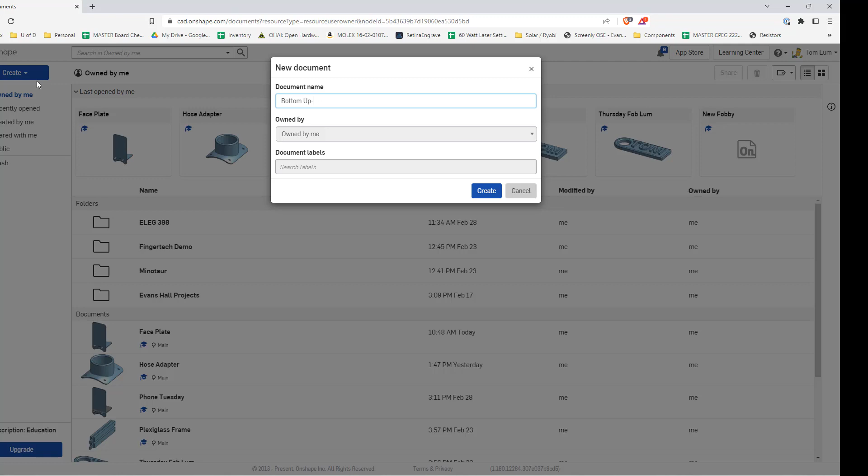Let's get started. I'm going to create a document, and I only need one here. I'll call it bottom-up phone stand. This is a different design technique than the previous one.

I'm pulling this from the file section. There is a document in the CAD files for a dimension drawing. I'm printing them out so you can have them, but it's all here, and it gives you all the dimensions you need for building this phone stand. That's what I'll be referencing.

First thing I'm going to do is Part Studio 1. That's going to build what I'm calling my faceplate. I'll select this front, hit P to get that plane, and N to go normal to it.

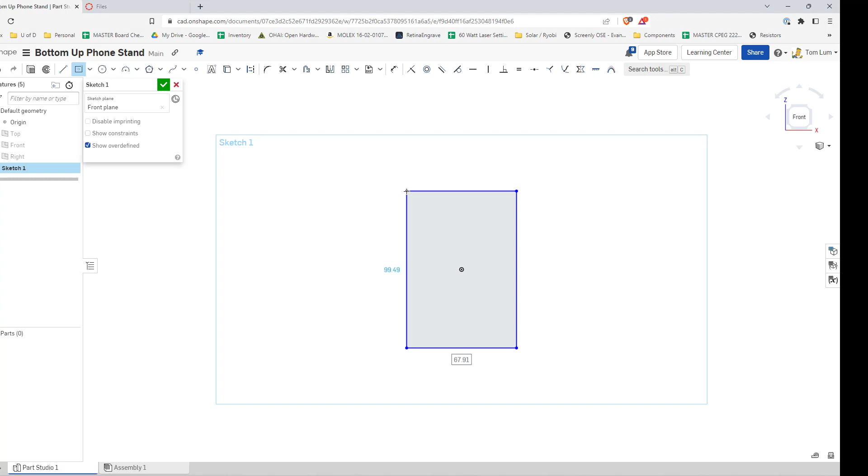I'm going to create a center point rectangle, locking on there, then 70 millimeters this way. Part of the lesson was learning to use mixed units, so sometimes that happens. I'm putting in 6IN for the other dimension. You can't use the quotation mark unfortunately, I wish they would let that happen. I've had a few times where I'm like, why won't this thing dimension? It's because I was using the quotation mark.

Fusion does allow that. Now I'm going to do some sketch fillets here, just rounding these corners with a dimension of 10 millimeters, rounding all four corners this way and grabbing another two sides. I'm clicking left, clicking left, click again, click once to set it, confirm it, and hitting enter to do 10. That's essentially most of the faceplate.

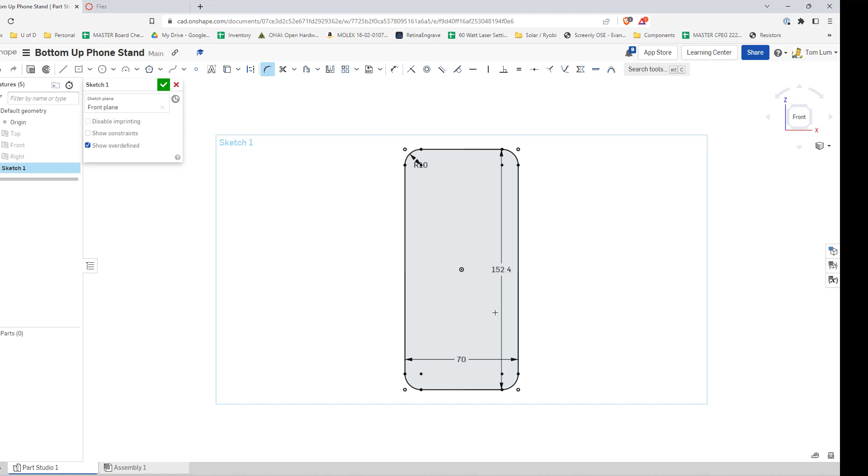Now let's create some legs here. I'll zoom in a little bit and do a 3-point arc with the A key, clicking here and here. If I turn this a little, you can see it's the ends of those fillets - when they finish up that creates a little dot. So I'm going to use those dots to build this arc on.

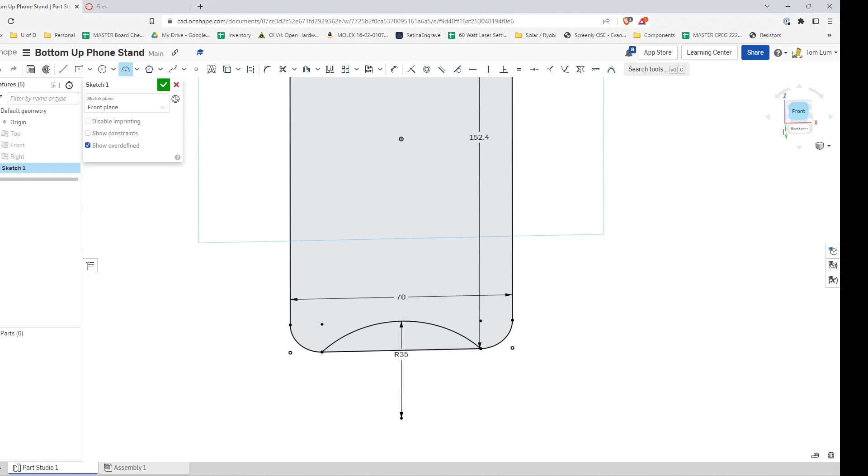I clicked on both of the dots, and then I'm going to radius this to 35. You'll notice this dimension goes out to here - that's because this radius is of a whole circle, and we're only using part of that circle or a section of it. You can click back on the front here again. So that is essentially the whole shape.

Now I just need to cut out those three little slots here that the legs will slot into and create our phone stand. For that, I'm going to create a line, and I'm not going to put it where it actually goes - I was talking about this in class. I typically don't draw lines or shapes correctly at first, so that way, hit escape, when I dimension them, I know they're locked into place exactly where I want them.

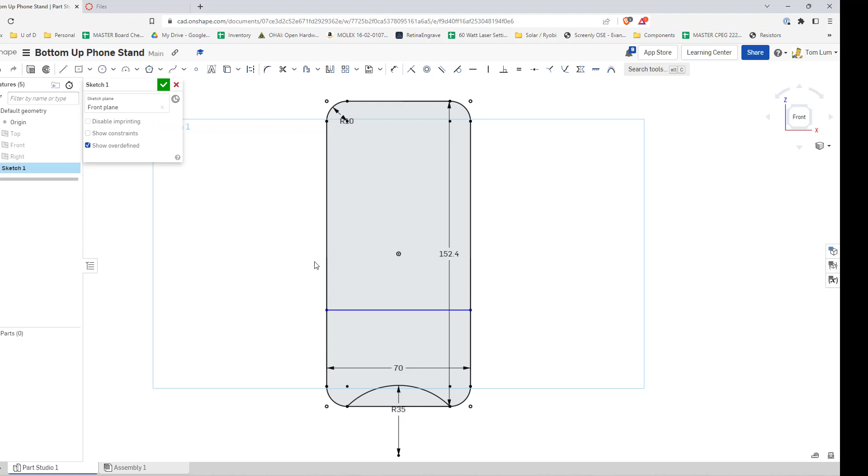This blue line right now is a solid line. I'm going to change that to a construction line, so it changes to a dotted line. This allows me to use it as a reference point without it actually being part of the official sketch, as it were. So the laser cutter, 3D printer, or any extrusions won't see this.

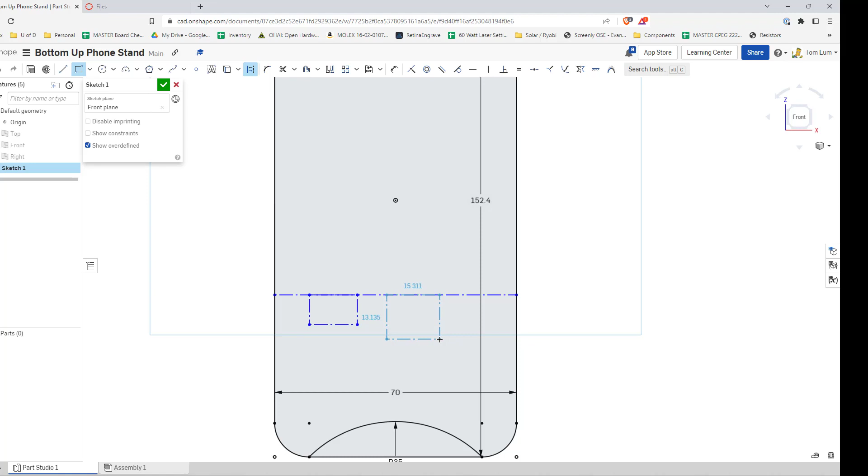Now I'm going to draw three corner rectangles using this construction line as a starting point. I'll draw them not anywhere near to scale, so that way I know when they're correct. Oh, I forgot to dimension that line - let me back up here. I'm still in construction line mode, so let me dimension this first.

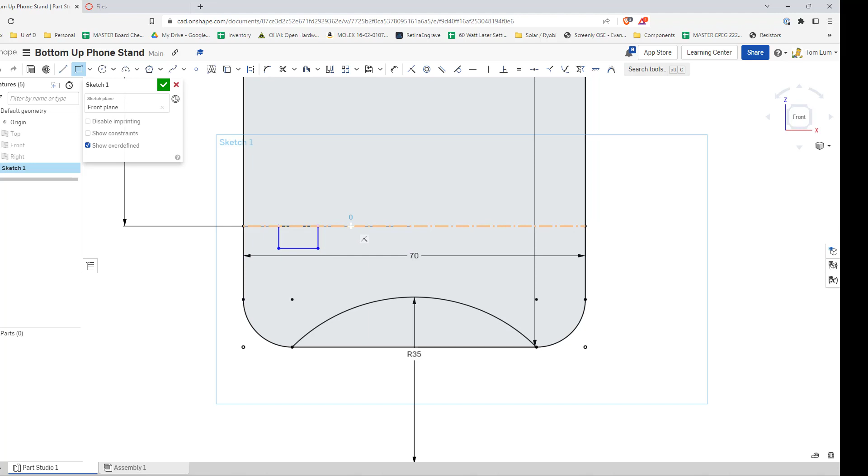This is going to go from here, to the top of the phone faceplate, to there - that's going to be 5 inches. There we go, I was wondering why it was a little weird. Now we'll draw these corner rectangles. Notice now they're not dotted lines - I didn't even notice until I was done. So, 3 rectangles there.

So now I'm going to dimension these. This dimension from here to here is going to be 10 millimeter. Again, from here to here, 10 millimeter. And then from here to here, 10 millimeter.

Now between them, that's 10, 10, and 10, which makes 30, and this whole thing is 70. So that leaves me 40 millimeters to divide up 4 ways evenly. Even if you aren't a math major, 40 divided by 4 leaves me with 10 on each.

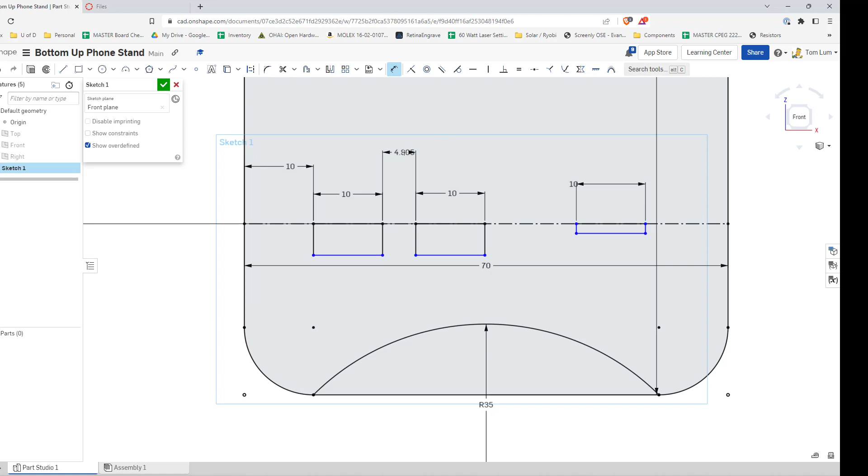So I'm going to go 10 here, 10 here, and then 10 here. In class, somebody did this, and this is perfectly understandable. You want to dimension this one, but this one is not a dimension you actually need to give it. It'll actually, in my case, show shaded.

His turned red. The reason it's shaded is because it was called a driven dimension. That 10 is not necessary because that's the only amount it could be, since I've used up all 70 for the rest of it. So that takes care of that dimension—I don't have to use it.

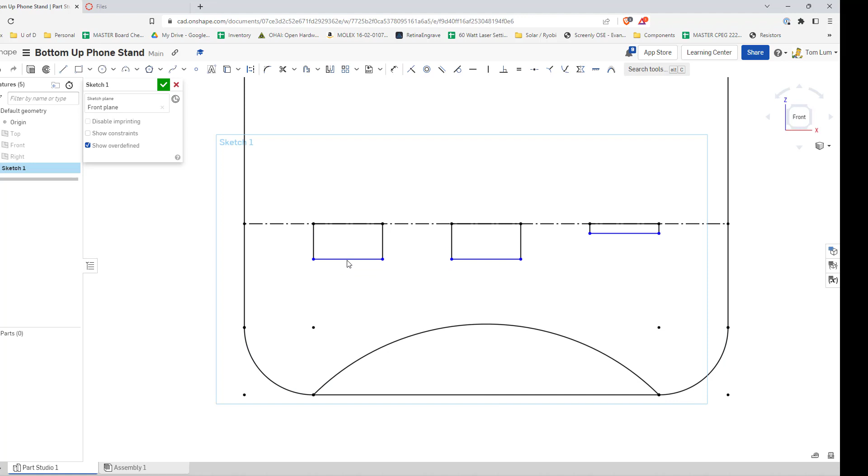All right, last thing. Let me hit escape here. These are locked in, or these two are locked into each other. I didn't want them to be, but okay. And then this one here, these are blue because they're not constrained. So I'm going to dimension them. And this is what we learned for today.

This dimension here is not going to be an actual dimension, but a variable. I'm going to hit the hashtag and type in thickness. This creates a variable, and it brings up a whole bunch of stuff here. So why is this a variable?

Well, different acrylic we cut this out of, or wood, or whatever, can have different thicknesses. Rather than putting in a dimension and then, if it doesn't work, having to find everywhere I used the dimension and change them all, I'm grouping them together as a single variable, and I'll create one dimension for that variable. In this case, 2.85 millimeter. Hit enter, and now that is 2.85 millimeter right there.

This one was locked to this one. Typically I'll show constraints, and I think it was this constraint here—not horizontal, I want to say it was a collinear constraint, or maybe not equal. Not sure where, maybe they're not even calling it collinear in Onshape, but either way, it locked in as well. I'm going to turn off constraints because it gets a little confusing.

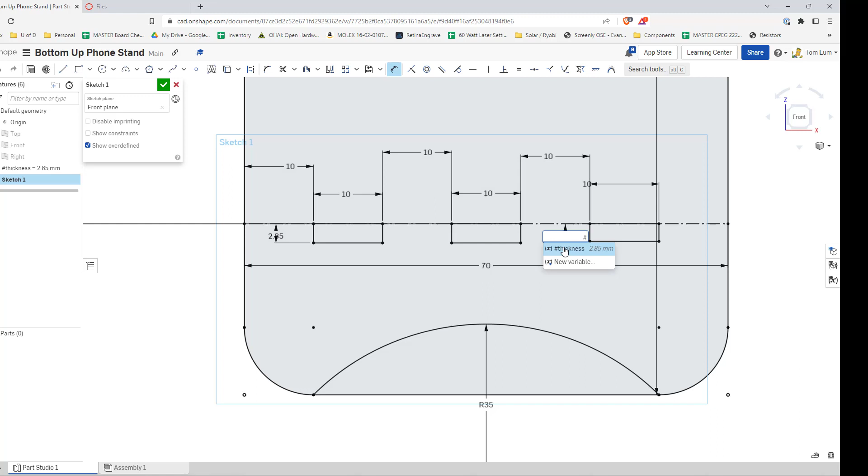All right, last one, I'm going to dimension this one by hitting the D key. Again, I'm not going to type in the number—I'm going to type in the hashtag or pound sign, then thickness, and hit enter. It seems to be... there it is. I was thinking about it for a second, like, why is it worried about that?

All right, so that is the faceplate. Last thing I need to do, let me finish my sketch here. Last thing I need to do is extrude this.

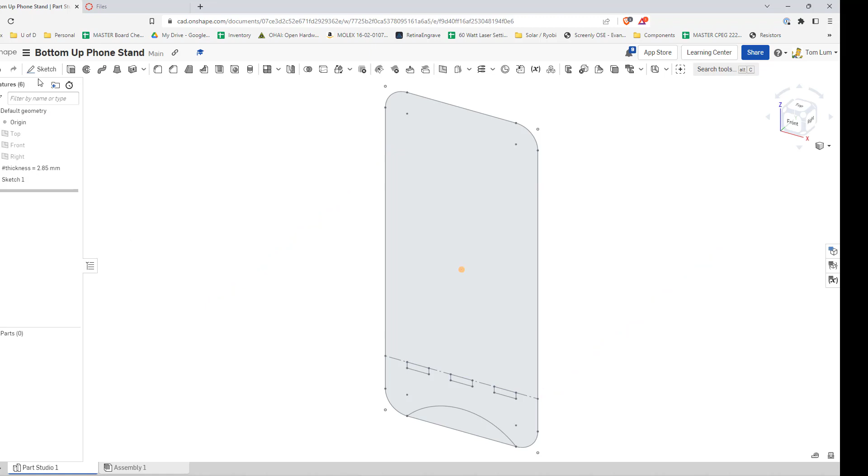I'm going to turn this on its edge a little bit using that top right front corner there. I like that corner for sketching or extruding stuff. I'm going to extrude this and just click this part. And now, same thing again—I'm going to use the thickness variable because that is the thickness of my acrylic, and I can change that at any time.

So there we have it, that is the faceplate there. And I'm now going to right-click down here. Instead of Part Studio 1, I'm going to rename this as faceplate, maybe Studio. And I'm also going to right-click this Part 1 and rename that as faceplate as well.

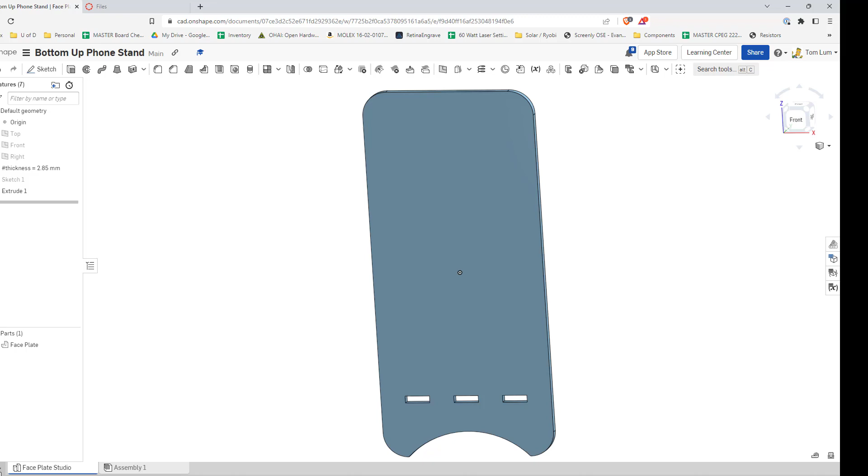So this allows me to know what this thing is because I'm going to make another studio now. If everything is called Part 1, it gets confusing when we go to put these together. All right, so I'm going to go down here, insert new element, the plus sign, create a part studio.

All right, new part. This is going to be the legs. So what I'm going to be building is this part here using this sketch, and we will then assemble them when they're done. Before I was trying to make a sketch plane on there, and things got a lot confusing. So I'm going to rename this right now, Leg Studio.

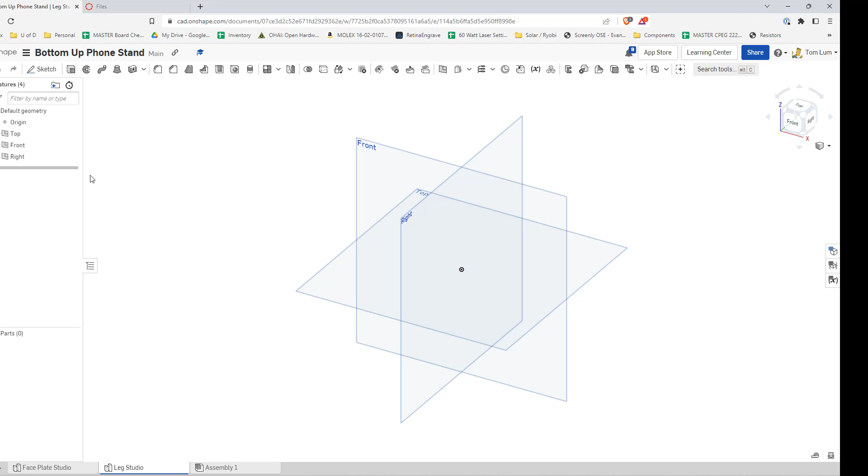And let's go ahead and start a sketch. I'm going to start it on the top plane, normalize, lose those. And this one.

Again, a center rectangle. I am going to go with, there's a few ways we could do this. I'm going to go again with 70. And in this case, I'm going to go with 60 for here.

All right. I'm going to fillet those edges, just these two, the top ones, if you want to call them top, right here and here.

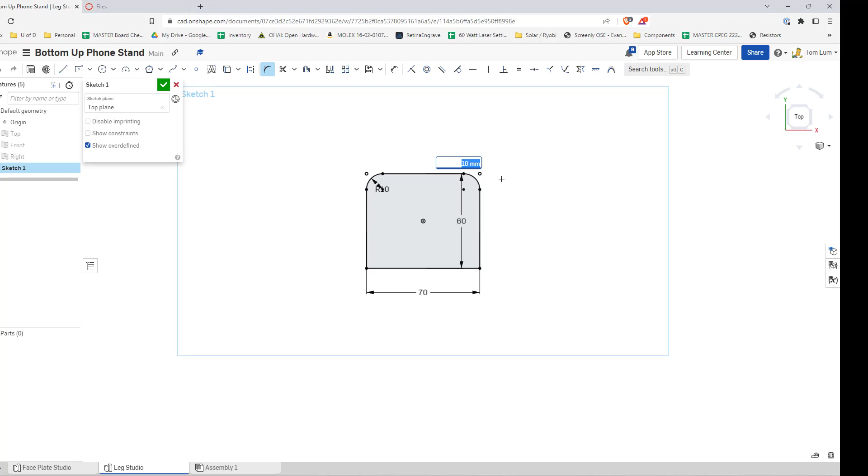I am also going to create that arc again here. This gives me legs. Oh, I did not get that click in there at just the right spot where I want to hit A, but I'm going to do it this way instead. Here and here. Pull this down again.

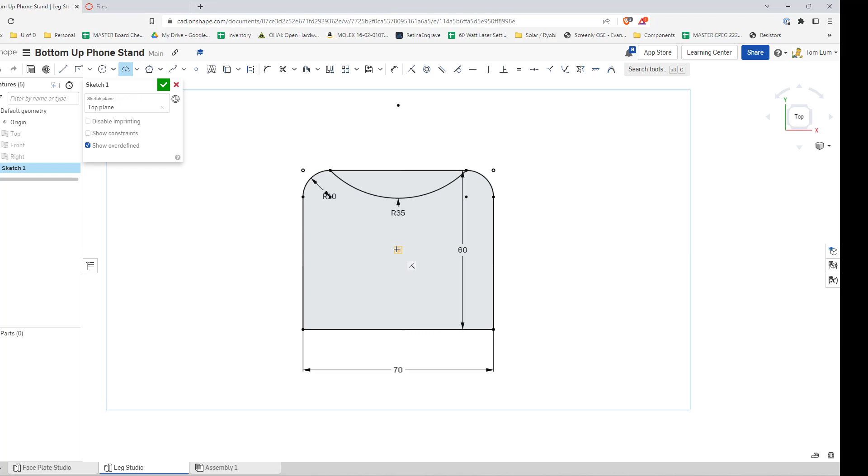It was 35. And I'm also going to create a circle here just to run like a power cord through if we need to, or just give it some visual flair. Something like that. All right.

So that's essentially it. That builds most of this. Now I just need to create these little bump out legs here.

So there's actually 3 of them. It's hard to see this one. There is one leg here. There's a little one that you can't see sticking through. I don't want it to stick through because if you're doing a charging cable, it won't be able to stick through there. And then this one, long one there.

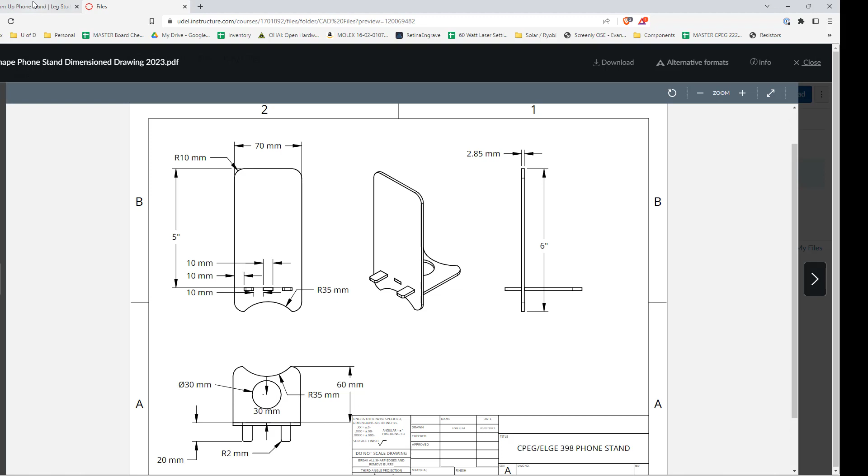All right, so again, going to do a corner rectangle. And I am going to draw these not to scale.

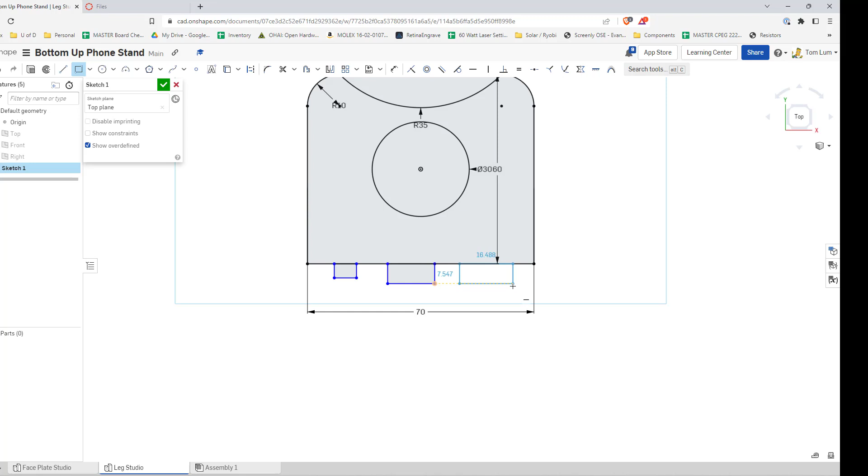Oh, see that line that showed up there? I don't want that to happen, that dotted line. It was trying to like zoom in or lock in on something else. I want them to be, see that? I don't want that to happen. I want them to be their own rectangle, if that makes any sense.

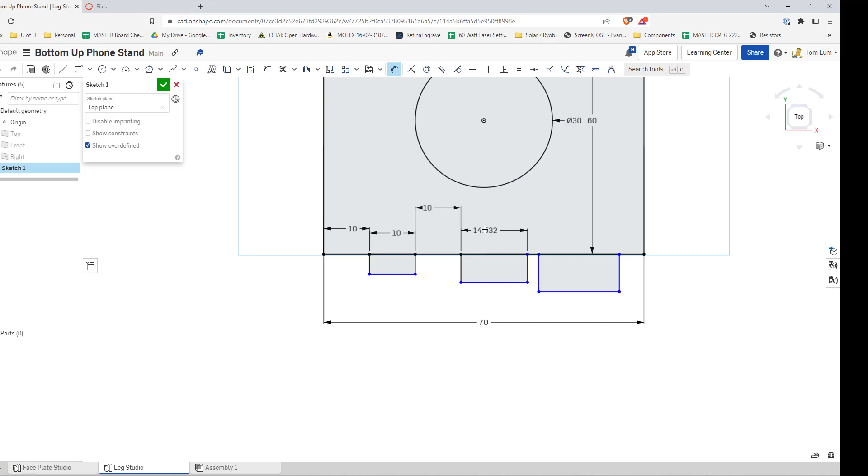All right, let's dimension these again. From here to here is going to be, again, 10. From here, that's 10. And this could also be a variable too, but I'm just going to put them in. We'll do one variable for today, and that'll be enough. 10. 10. And lastly, 10. So now notice they are different lengths, but these are going to be different.

So first one here, this one is going to be 20. And this one is going to be 20. This one only needs to stick through and go flush. So that is that variable thickness again, because it's only going to go through the faceplate.

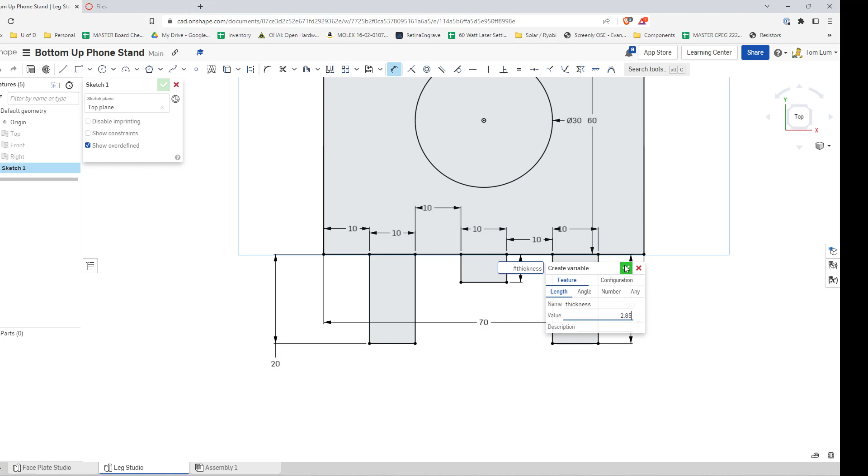Oh, this doesn't know about the old variables because it's in another part. So I'll have to create this again. I do want to do it, even though it's just one. I want to be able to find it again. So if I need it, we could do that one. There's probably a way to link it to the other one, but I'm not that familiar with Onshape yet, so we'll just call it thickness for now.

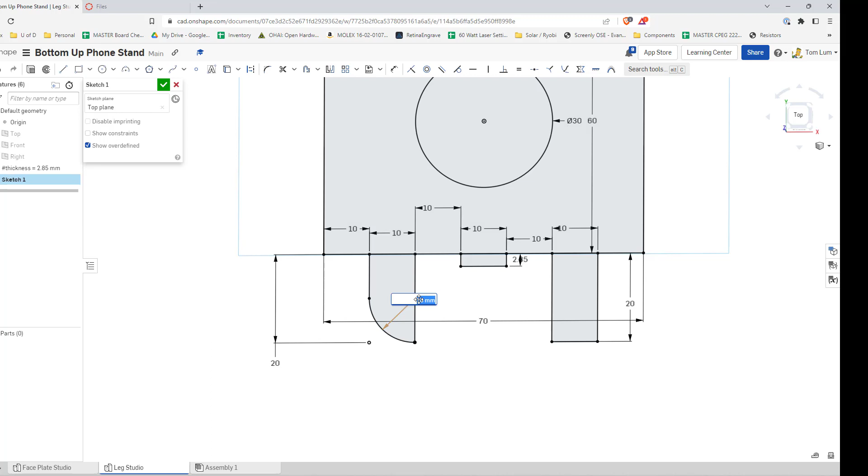All right, last thing I would like to do, I want to fillet these edges, just these two here. I'm going to do a 2 for this one. Let me do 2 millimeter. Reason I want to do 2 millimeter makes it easier to insert those legs through invalid geometry because it's too much. All right, let's try that again.

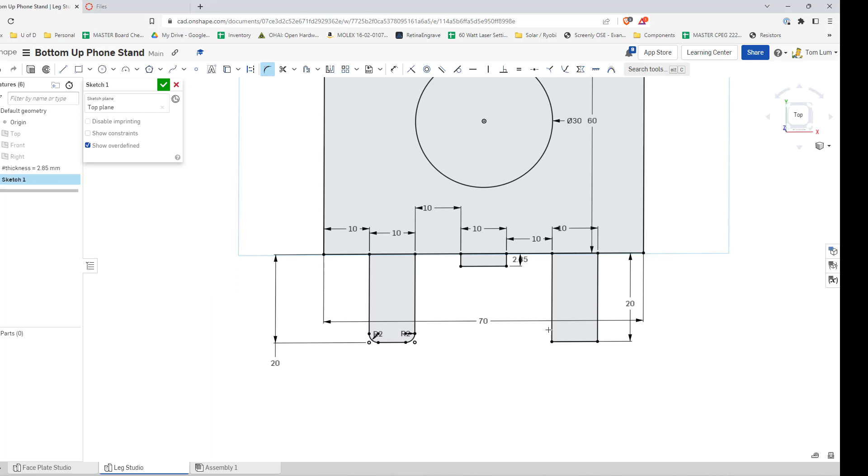It's not happy with, it's trying to remember 10, I guess. All right, let's pull that back out there. And we'll do 2. Try that again here. Hopefully it remembers 2 now. Yes. It kept remembering 10 for some reason.

And then 2. So these allow those forks or legs to stick through there and makes it easier to insert into the other piece of acrylic. All right, so that should do it.

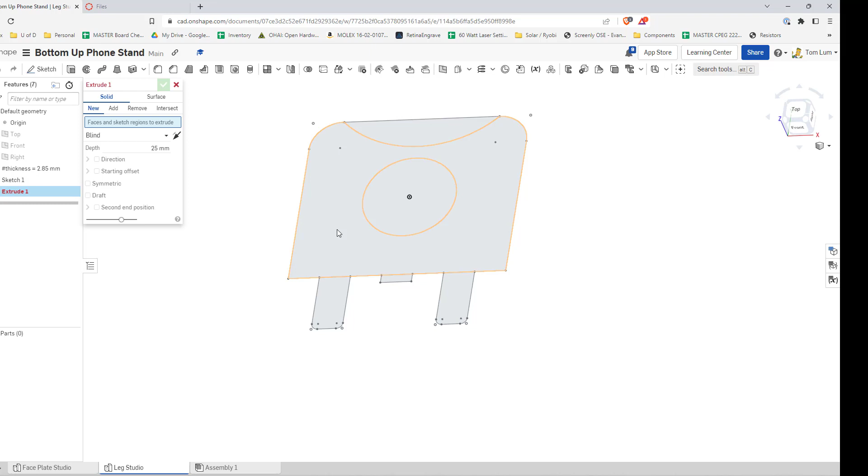All right, so now we're not going to select this part. We're not going to select this part, but we do need to pick up these legs when I extrude it. So I'm going to extrude. I hate that it just does 25 each time because then it makes it hard to understand what's going on.

But we want those 4 parts. And again, we're going to do thickness. Click OK. So that is my legs. So I have now my faceplate here, my legs here, and now I'm going to create an assembly.

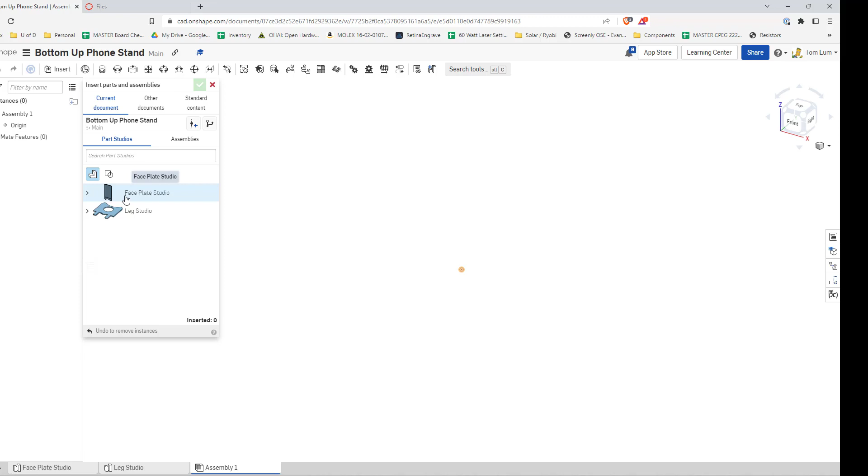This is going to assemble them together. So right here, I need to insert the parts that I want. You can see now why naming them makes it easier. I can hit that chevron and just say faceplate. Only do it once, otherwise it brings in a few of them if you keep clicking again.

Need to hit that chevron, hit that part. Now I forgot to name that part, so that's why it's saying part 1. All right, I'm just going to click somewhere and click OK.

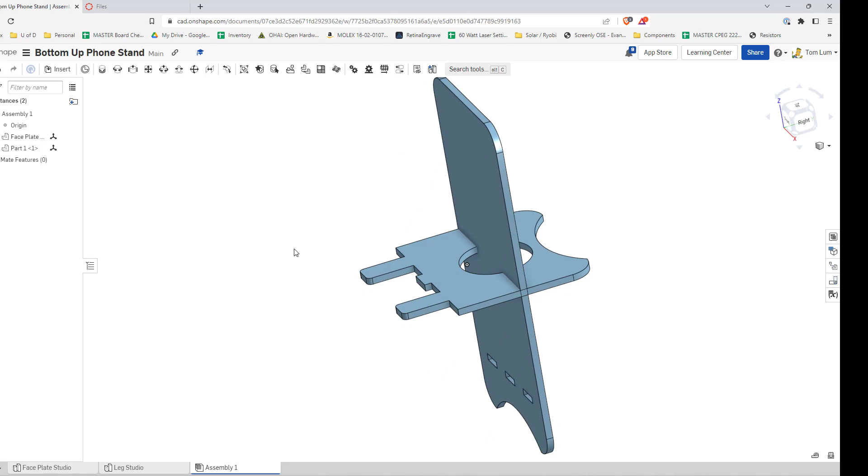Now, this is a horrible phone stand, as you'll notice. It is just going by that origin. Remember, we built each of these kind of centered on the origin. So what I need to do now is tell it, hey, these legs need to go through this part here.

I only need to do one part, so I'm actually going to use this rectangle here and lock this to the front of this rectangle here. So that is a fastened mate. That's the most common one. There's no movement in these. It just kind of glues them together, if you will, digitally glue.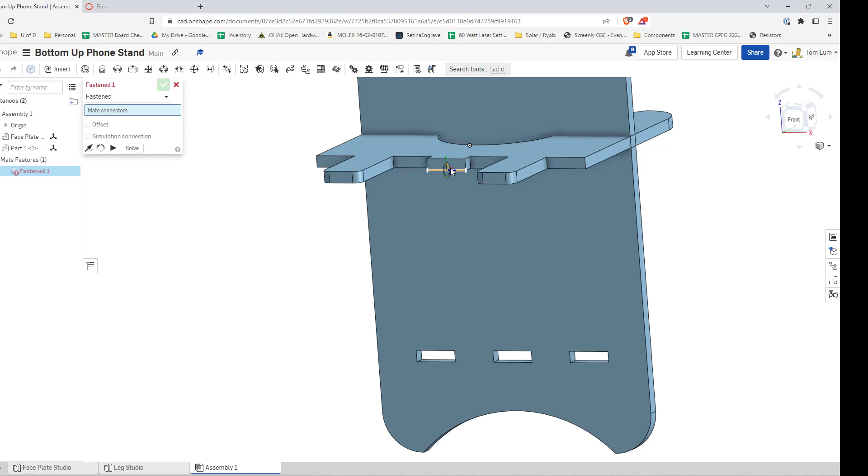So I'm going to click on that. And then I'm not clicking anything yet, I'm just hovering. But you can see it's like picking up all these geometries, and it's like, where do you want? So what I'm doing is I'm going to zoom in here. You can do a lot of different ones, but I want that dead center of that rectangle there.

And then now when I go to this one, trying to pick somewhere in the middle of air is really hard to do. In Fusion, you right click or hit Control, I think. In this case, you hit Shift.

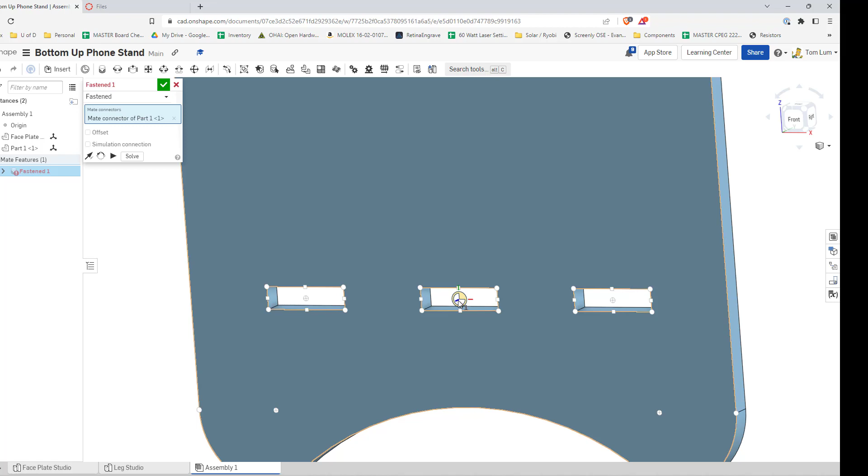So what I'm going to do is go onto kind of the corner here. I'm not clicking anything yet. I'm going to hold down the Shift key, and that allows me to move around an empty space and select that center there. So if you kind of see what's happened, it's locked that in place. And I'm going to go ahead and click Commit, which is kind of just yes.

And now I have my phone stand. Let me just hit F to fit. And there is my completed phone stand. I can do this, and you can see it here. Thought that actually that other view was a little bit better, but nope, there we go.

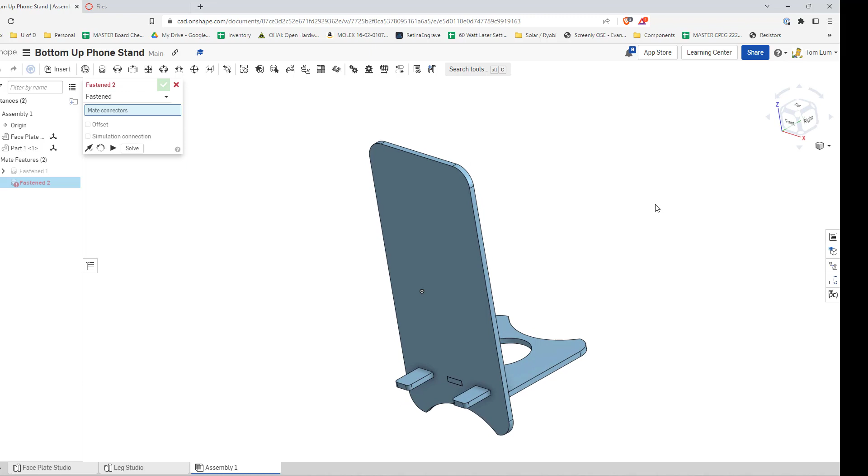All right, so now last problem. We're running on 16 minutes here. We need these faces, and you're going to send me a DXF file of these faces. So if you want it laser cut, well, I have to grade them, but if you want it laser cut, I need those DXF files.

That's what either Inkscape or Adobe Illustrator uses, and then they send it. The laser cutter essentially thinks that it's a big printer, so I send it from Inkscape into the laser cutter software, and it goes from there.

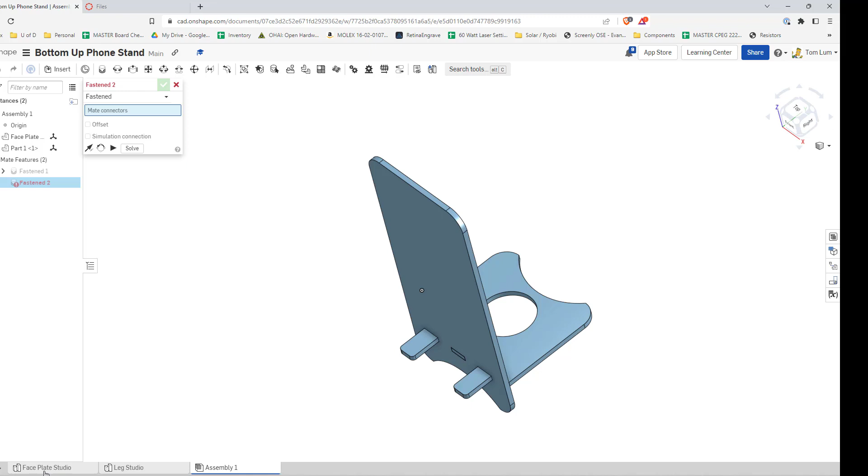All right, so back to the faceplate. This is the easiest part of the whole game. I'm going to right-click and don't click export, but right above it, export as a DXF. So I got my LUM faceplate DXF, click export, and I'm going to save it in my files, click OK.

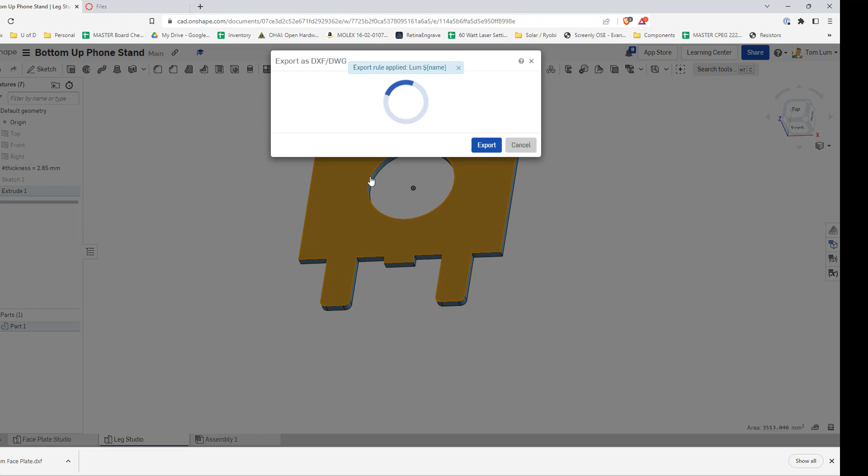Then I'm going to go into my Leg Studio, same thing, hover on the face, right-click, DXF export. If you do the other one, if you just click export, it has like, this is how we did the STL file, but you'll notice there is no way to find a DXF here. This is trying to do solid parts. So I'm going to right click and do export as DXF and then export that and save it there.

And those two DXF files are what I will grade and what I will use for the laser cutting if you want it laser cut.